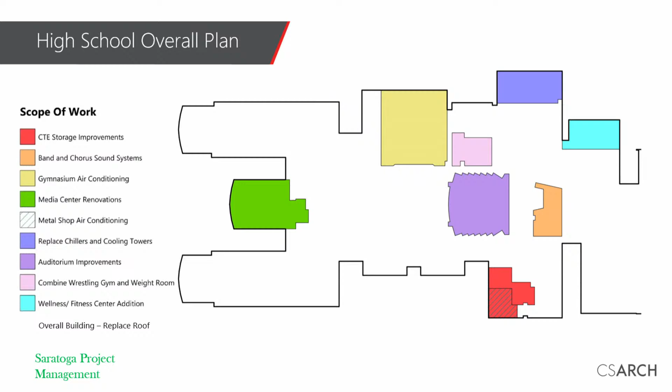Media center renovations, we'll look at a plan of what we're talking about here to enhance the use of this space. We already touched on the metal shop air conditioning. The high school is currently air conditioned, the majority of it, but the chillers and the cooling towers that provide the cooling for the building are original to the building for the most part, and therefore we're going to be replacing those to make sure that facilities continue on.

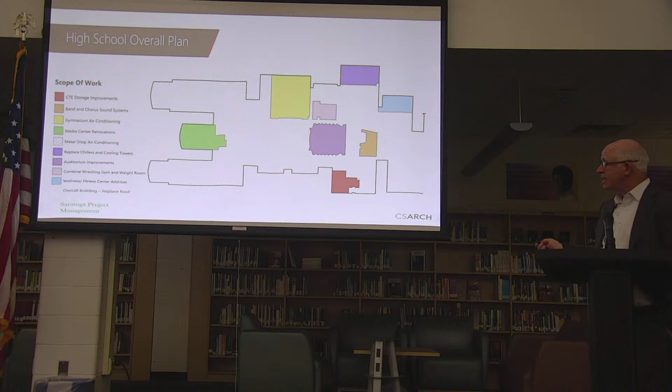Auditorium, again, most of the auditorium, the seats, the curtains, everything are original to the construction here. So we're looking at doing renovations in the auditorium. We're going to look at building a new fitness center in this area, and what that's going to mean is the small fitness center that's here, they'd like to take down the wall between the wrestling gym and the fitness center to make a larger, more useful space there. And then a wellness and fitness center we'll look at in a little more detail in a future slide.

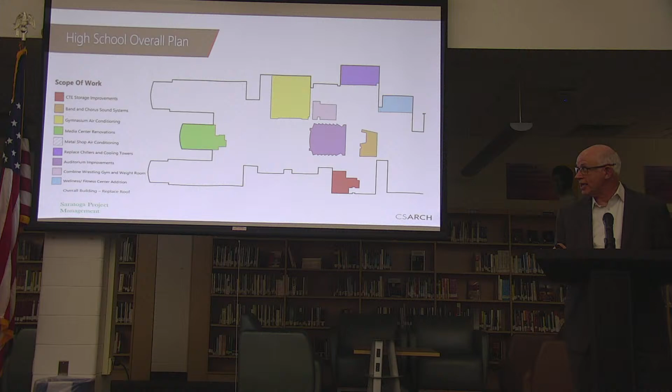As far as the plan of this high school media center, really three or four elements that we're working on here. In this area right here, we're looking at constructing a couple small group study and project rooms for groups to be able to sign up and work in. The area up in the corner here is currently resources for teachers and teacher development, but it's just open to the rest of the library right now. We're looking at making that its own separate room. And then the office and workroom up in the far corner, we're going to combine all that space together to make it more flexible and useful for the librarians.

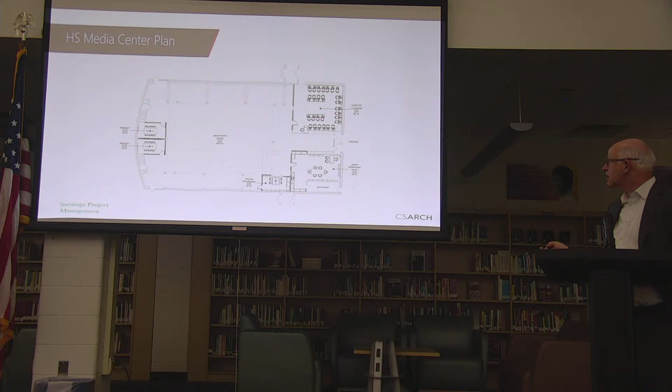And then in the computer classroom in the back, the windows you see there are going to be taken out and filled in with a solid wall to make that completely separate from the media center.

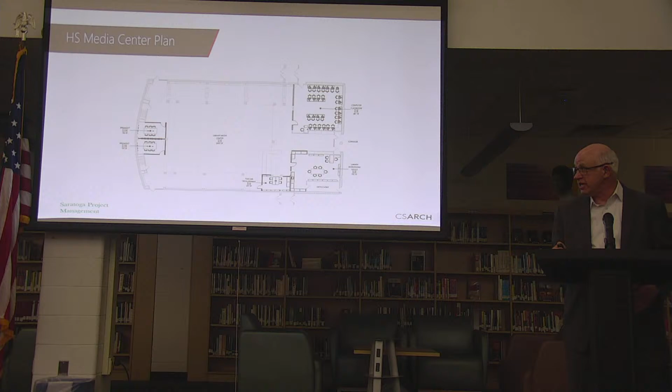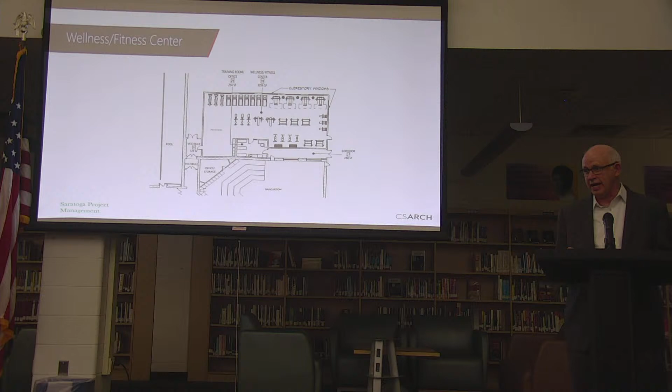One of the major elements that we're going to construct is an addition to provide a larger, more useful wellness and fitness center. This will be used not only by the athletes for their training, but also as part of the physical education program for lifelong fitness skills. So this is an addition here off the back of the building. It includes an open area for aerobics and other activities, and then a combination of cardio equipment and weight training equipment. We haven't worked out the details of exactly those layouts, but that'll be worked out with the athletic director as we go forward.

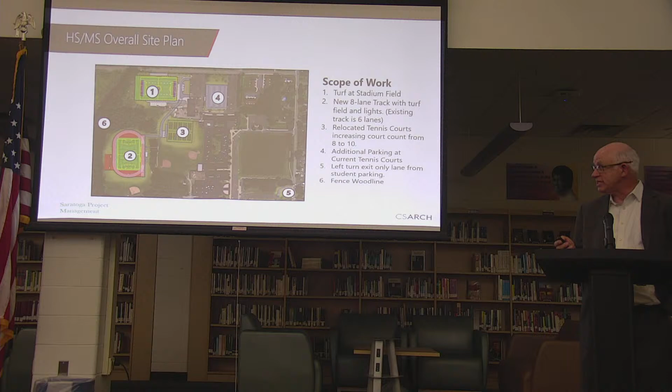Now I'm going to move to the exterior and look at the overall site plan for the high school and the middle school. This gives you the overall big picture scope, and then we'll look at a couple slides with a little more detail. So the major element of this project is the proposal to create a turf field at your main, I call it the stadium field right now. To get the size of turf there, we're going to actually relocate the track, so it will just be a multi-purpose field at that location. The track will be moved to the back here, where we're proposing a new 8-lane track, where the existing is only 6 lanes. And we'll also provide lights and turf inside on that field.

We're going to relocate and expand the tennis courts, going from 8 courts to 10 courts, and put those in this area. And then the existing tennis court area, we will convert that to additional parking for the middle school and high school in the field area.

Number 5 is to create a new left turn only lane out of the student parking lot for safety reasons, to get the students able to pull out there without having to go through the rest of the traffic. And then again, as a safety feature, item 6 is we're going to install a fence all the way along the property line between the high school, middle school property and the adjacent property, to prevent anybody coming from neighboring properties onto the high school.

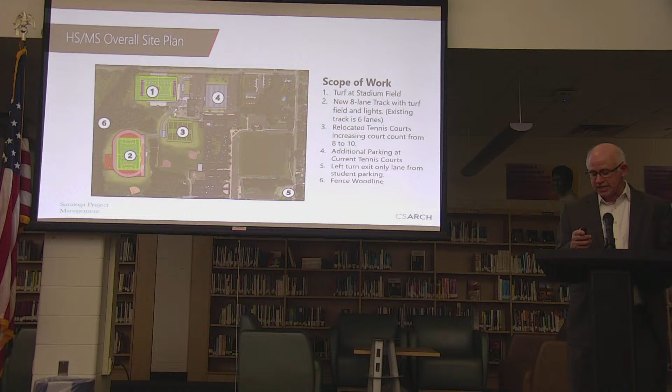Just looking at a little bit more detail of the main field. In addition to the main field, we're also going to be providing larger visitor bleachers by taking the track out. One of the reasons to take the track out, it gives us room to provide those additional bleachers between Garrett Road and the field. We had looked at an option to put a new 8-lane track here with the field inside of it, but you end up having to move everything, including concessions and home bleachers. So it was a considerable effort there.

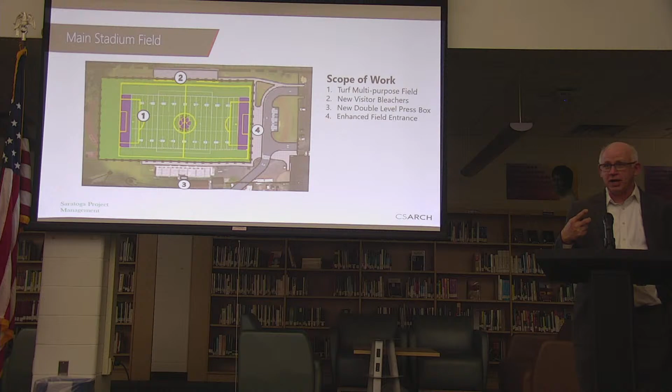The press box is going to be replaced with a 2-story press box, so you can have home team press box on one level and visitors on the other level. We looked at making it longer, but the way the bleachers are set up and how the press box works with them, it would have required some significant work on the bleachers. So we determined that going up an additional story was easier.

And then it gives us the opportunity without the track to make a better entrance procession into the field. It will include this drop-off area with some handicap parking right near the field there for those activities also.

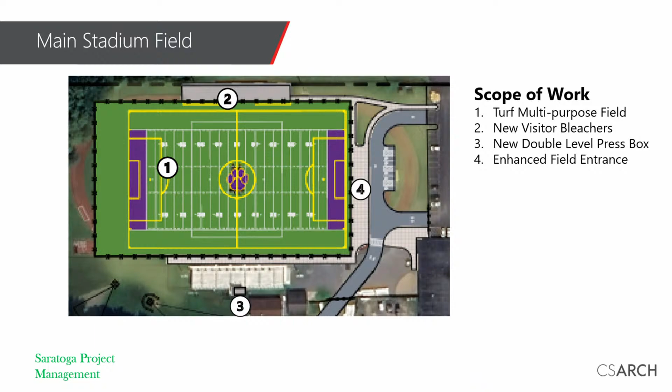Looking at a little bit of the detail of the track and field, again, we have the 8-lane track, we have the field event area off to the side, the pole vault and the long jump. We have the steeplechase. Some schools don't put in steeplechases anymore, but the athletic director determined that they would because that lets you host sectional meets.

The turf field inside here, and then a small area of bleachers here, an area to be able to put up tents to house concessions. We didn't plan for a built concession stand at this site. An area where we're going to put in some toilet facilities. Once you have bleachers, State Ed requires you to have toilet facilities out there. You can't use just portable toilets. And then we have a storage building here, and then lights for this field.

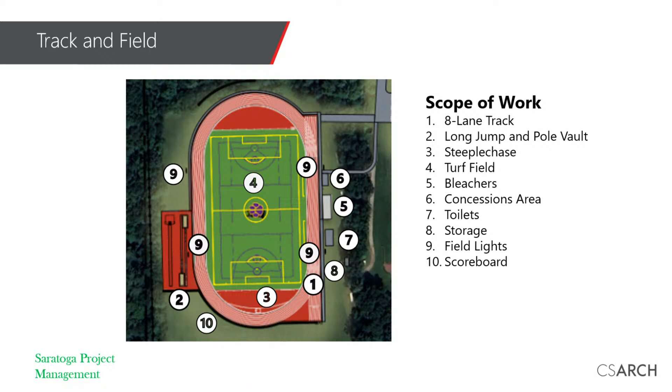Looking at the scope of work for the building of the middle school, the kitchen has not been renovated in this building for, I think, over 30 years. It may have been even longer. I think it may have been '91 that the kitchen was renovated, and the actual walk-in cooler and freezer we think dates to the original construction in the 50s. So that's served you well. At the same time, we're going to replace the cafeteria flooring and air condition the cafeteria. We'll be air conditioning the gymnasium.

We'll look at some more details of the media center renovations here, as well as the health suite. And then the main entrance storefront we're going to replace, and then the faculty toilets in the 400 wing will be renovated.

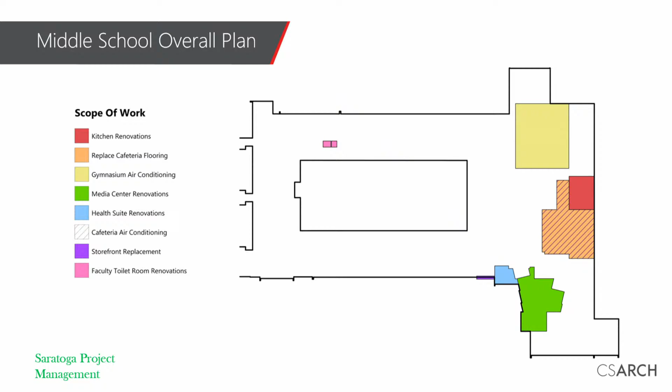As with the high school work, this is a more detailed plan of the middle school media center work. A couple of the main things we're trying to achieve here is to get them an enclosed classroom off of the media center where they can take a class of kids in and work with them there and not have the noise disrupting the other activities of the media center.

To do that, there's a number of special ed functions back in this area now, so we're going to move those up to the front off the corridor, giving more access for parents and people that have to come in to meet with them. So there'll be the special ed TA office, the CSE office, then a library office and a library workroom, and really upgrade the media center at the middle school to a more 21st century media center.

And then this is the renovated nurse's office. It gives a 3 sick cot area, 2 nurse workstations, a fully handicapped accessible toilet room, a private exam room, and then a waiting area and triage area for students coming in to the nurse's suite.

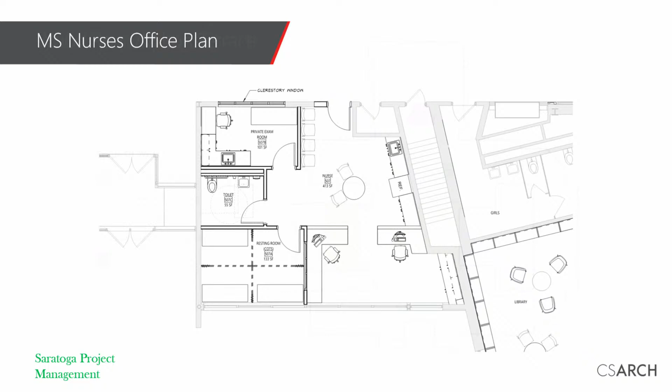Moving on to work at the Wood Road Milton Terrace building. Again, quite a bit of air conditioning here. Again, the gym and the cafeterias are being air conditioned, as well as the special ed classrooms identified here and here in the 2 parts of the building. We're also going to renovate the toilet rooms in the Wood Road portion of the building, as well as renovate and enhance the little theater in that building.

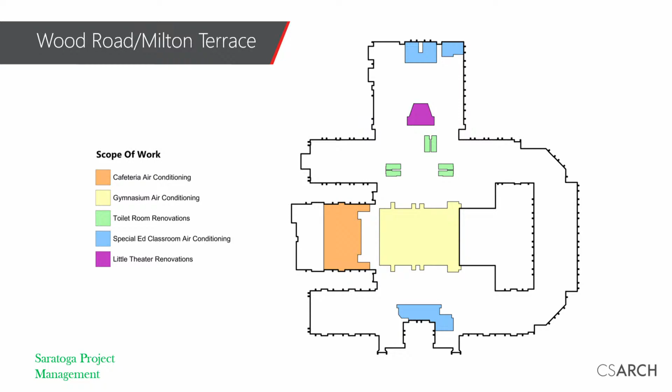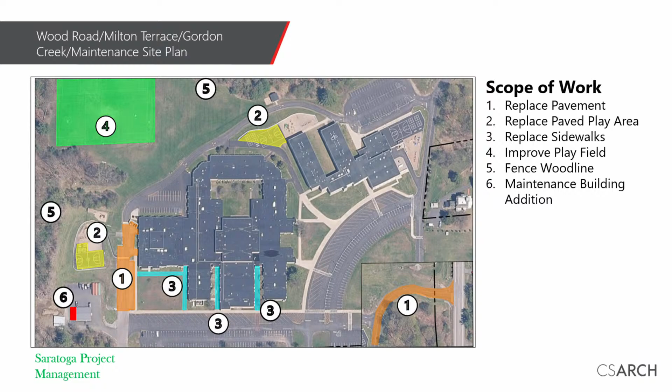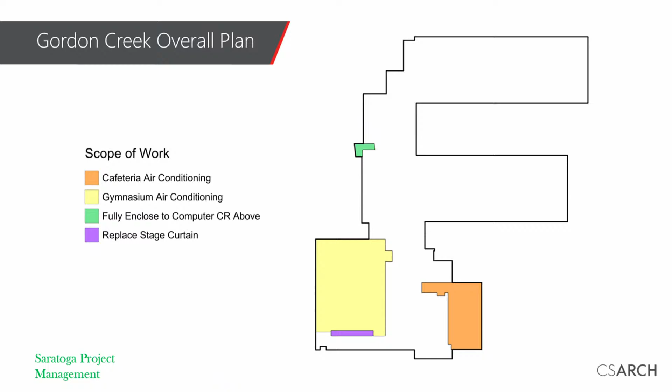Probably more importantly is some of the work we're going to do on the outside at Malta Avenue. The first thing is to replace some of the deteriorated sidewalks and pavement along the road here. We want to infill some of the sidewalk between the building and the current sidewalk. There's been some erosion there and some drop-off potential safety issues there. And we really can't get grass to grow because of the kids always running through there. So the plan there is to add pavement between the existing sidewalk and up to the building.

Add another playground area in this area for Malta Avenue, and then the front playground, finish off fencing all the way around the front playground so that they can bring students in there and not have to worry about them running off, because only along the road is currently fenced.

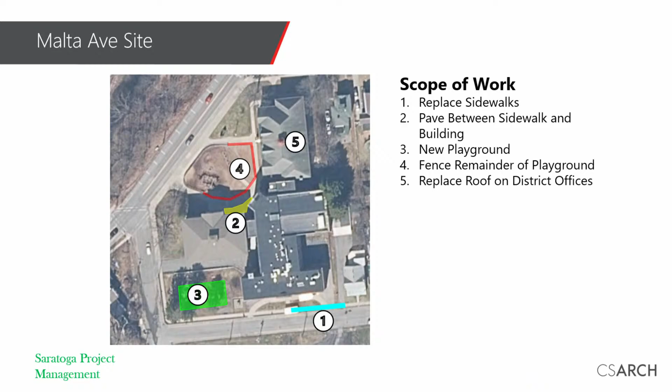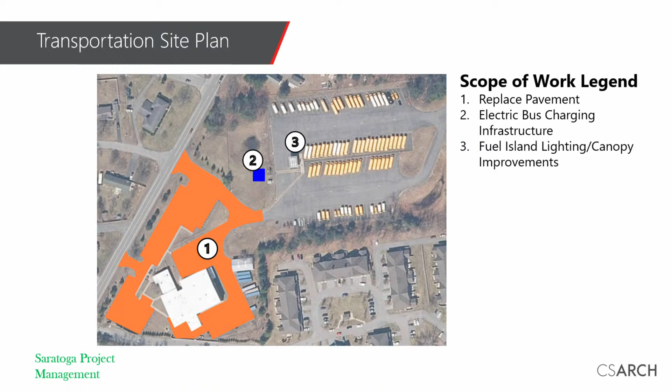The grounds building, which is the old bus garage behind the middle school, we need to replace the roof on that building, replace the overhead doors, and install an oil water separator. And while I'm thinking about roofs, I didn't mention that we're replacing the roof on the high school building also.

And actually, we're going to put an overlay, a liquid coating over the whole roof that you can still get another 15 to 20-year warranty on by doing that. We had the manufacturer of that system out here to look at it, make sure it was a good candidate. And he says yes, and we can save quite a bit of money proceeding that way.

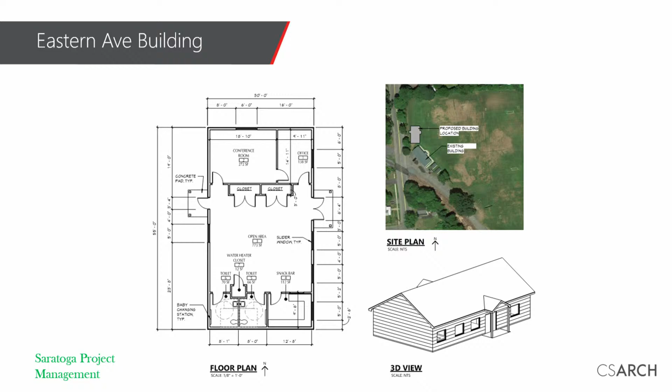New building for the Eastern Avenue field to make it more useful and less susceptible to flooding, depending on the storms that we've gotten. So that's being planned to be constructed next to the existing building that's out there. It will be available for district activities as well as other community activities at that field. So that kind of goes through the scope.

Now just to look briefly at the big picture schedule for the project. So the pre-referendum schedule up until the vote, 2 weeks from today on September 17th, the plan is to set the final budget, talk about the tax impact, and then complete the SEQR, State Environmental Quality Review Act process, which we're finalizing the work on, and Chris Honeywell's working with us with the specific resolutions that are going to need to be passed relative to that.

Then on October 1st, at a regular meeting, pass the actual resolution to set the vote date and finalize everything that's going to the public. And then the public referendum on December 9th. In between October 1st and December 9th will be the public information period where we get information out to everybody to make sure they understand what the project is, what the costs are, and what the benefits are to the students and taxpayers of the district.

Then once a successful vote happens on December 9th, we've broken the project into 4 different phases. Phase 1A, which we're going to get started on even before the vote, is to replace the cooling towers here at the high school. They are showing their age, and if they go down, you'll lose cooling to the building. So we want to make sure we can get those replaced as soon as possible. The plan right now is to replace those next summer to maintain the cooling there.

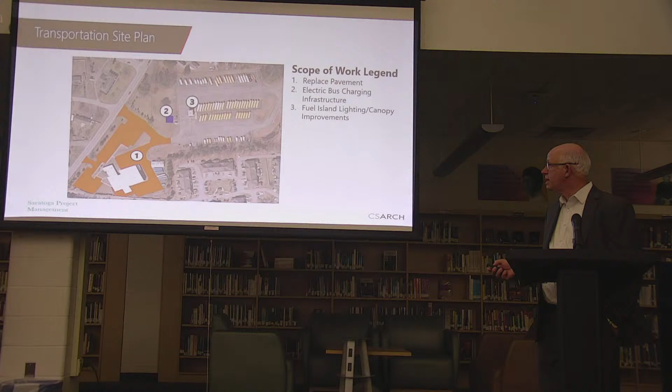And I did see it looked like there was a driveway going to the track and multi-purpose field in the back there. Will there be any handicap parking there? Is that going to be a road for vehicles? Will that only be for golf carts and things to get people back there? Well, one of the main things is it will be usable for vehicles, because we've got to be able to get an ambulance back to that field if we need to. So that will be the case. As far as handicap parking, we're planning a few handicap parking spots here so they can be used for both the track and the tennis courts.

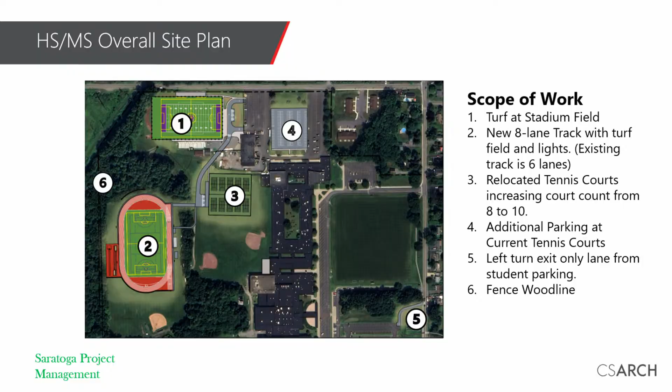Okay. So if that's going to be meant to be vehicular traffic, et cetera, I think it just has to have all of the curbs, lighting, et cetera. We have to make sure that's as safe as possible, because it seems like there's going to be a mixture of foot traffic and potential vehicular traffic. And probably from an operational standpoint, since the only parking that's going to be back there will be handicapped, we're probably just going to gate it at the end.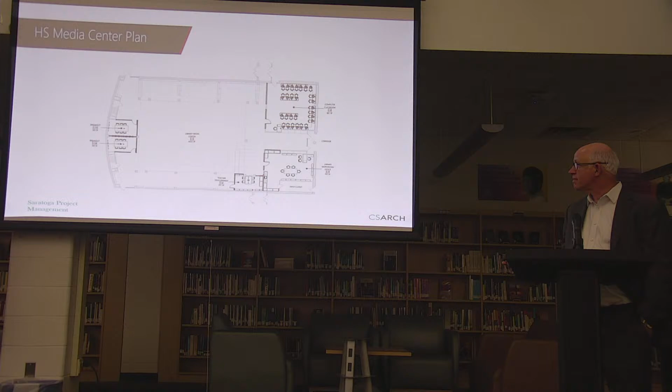Whoop, keep doing that. We'll probably gate it up here somewhere. So somebody's going to have a handicap pass or have the need to get back there; we're not just going to leave it open and let anybody try to drive back there. Because we know what will happen is somebody will say, well, I drove back there and I parked on the grass type thing. So, Dr. Duca, we're just going to have appropriate staffing, personnel, et cetera, to deal with all that.

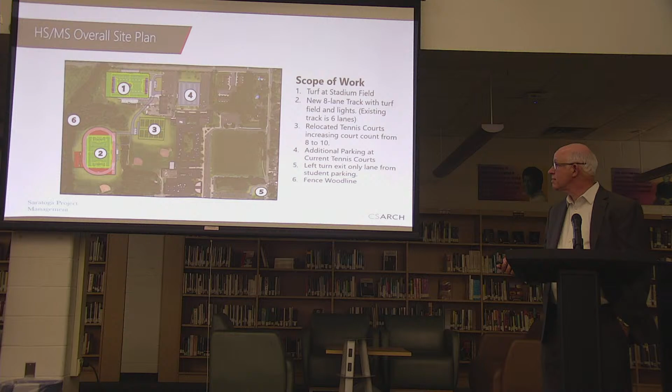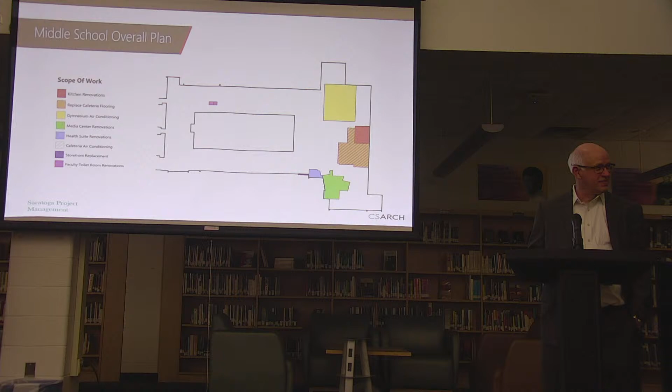And then can you flip forward through the slides? No, one more. One more. Yeah. Okay, I see what it is now. I got it. And then, just so we're clear, the board approval of the project, is that the 9/17 date or is that the 10/1 date? Because the 10/1 date was definitely setting the public vote, but I didn't know if that was also the board approval date.

On 9/17, the formal action the board will take is to approve the SEQR resolution. I believe that'll be the only formal action the board will take then. And then October 1st will be the date when you take the official action to set the vote date, set the vote amount, and pass the bond resolutions that need to be passed at that point. So just so everyone knows, our questions, thoughts, further feedback, et cetera, we're working towards that 10/1 date.

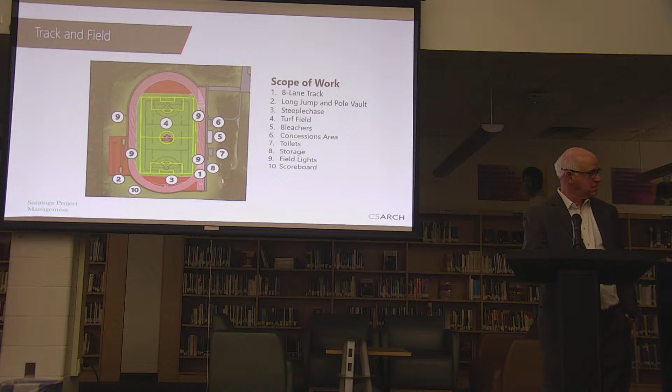And I don't know if this is a question for Mr. Siriani, but does the phasing have any financial component and/or state reimbursement component to it? It has both, and those are being worked on. In fact, I have a meeting with some of our advisors tomorrow morning, and we've been meeting weekly. We've worked out the schedule of the projects, and we have to work out when the final cost reports go in, because that dictates when the building aid starts.

Okay, so just for everyone's knowledge, there's not only the logistical construction pieces of ordering materials, having workers around, et cetera, to the phasing, but there's also a financial component, to try and maximize aidable funds as much as possible. I think that's all I had. Any other questions, comments?

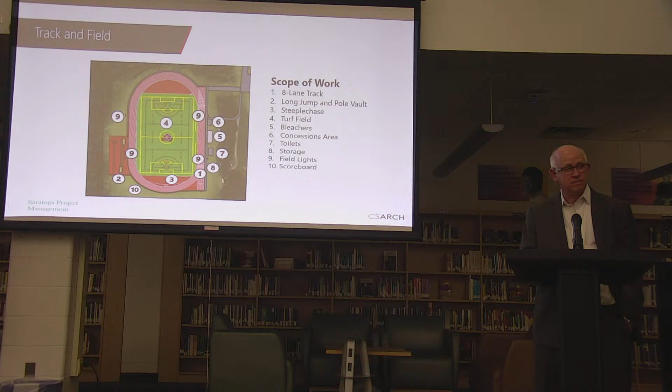It's very exciting. And again, to our community, part of the promotion and communications are that we really are trying to have improvements in many different areas. Many academic improvements actually happened in the last capital project, where we were modernizing classrooms, getting rid of the 1958 sinks in the science rooms in the middle school, and doing the work at some of the other buildings.

And so now, besides roofs, it's time to look at some of the outside components as well, and some of the larger spaces: libraries, auditoriums, gymnasiums, and the kitchens. The kitchen from the old high school, now our middle school, as he said, has served us well. So, okay, is everyone comfortable? All right. Thank you. Appreciate it. That does conclude tonight's superintendent's report. Okay, thank you.

Do we have committee reports tonight? Don't think so. Correspondence to the district: we had 4 total this time period. 1 email regarding transportation, 2 calls regarding transportation, and 1 call regarding a student matter. And there were 3 emails to the board since the last meeting, 1 regarding the district website, 1 regarding district policies, 1 regarding transportation. And we have announcements. Ms. Delaney Elliott.